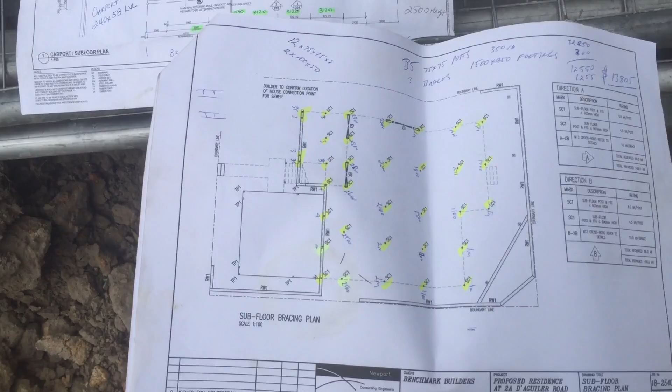They're owner builders, other carpenters, brickies. Okay, to get this sort of experience, it takes a lot of time and effort. If you can get it on video while you're at home at night time, like I do, go chase up how to do things, then it makes things much easier. Okay, it's called research. If you don't know how to do it, find somebody who does.

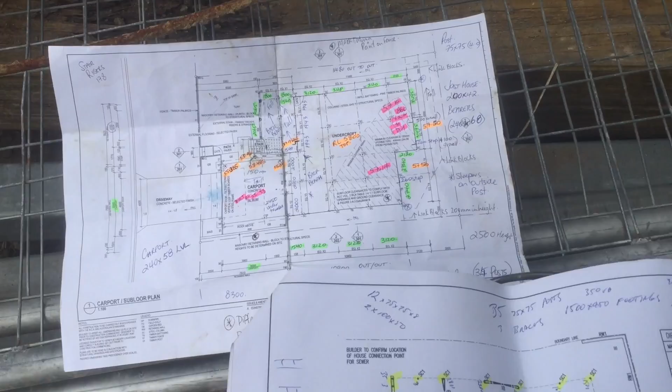Alrighty, what we've got here is a set of engineering plans. Not important who the engineer is. There are many good engineers out there. There are many bad ones. Okay, just like every other contractor, you get good and bad. Varying stages of good. Some fair, some medium, some good, some very good. Alright, I try and stick with the better ones when I can. I do know which is which. I've worked with enough of them. But most of them are okay, as long as you understand who's who and you know what you need to do. I always upgrade on these plans.

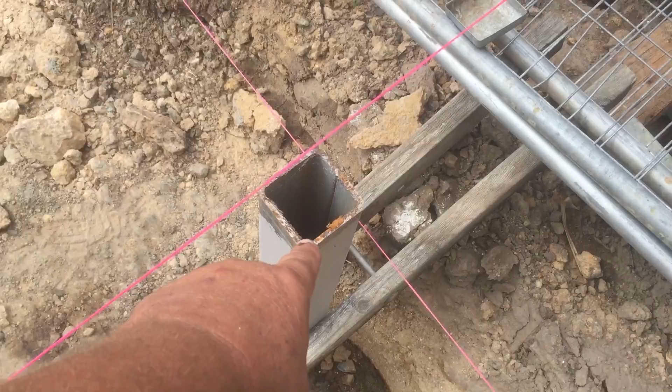For example, the current standard here in Brisbane for 75mm posts is 75 by 75 by 4mm. Okay, 4mm, it's only 4mm thick. This one here is a 5. Alright, she's 5mm thick. This one over here, that one's 6. Okay, that's 6mm. By the time that's chopped down to only 400mm high, you can kick it all you like, you're not going to move the damn thing. Alright, whereas 4mm will still vibrate at 400mm high.

You right, Frank? Yeah, Frank. Try to lift the bag. I'll leave it back there for a minute. Frank trying to hurt himself.

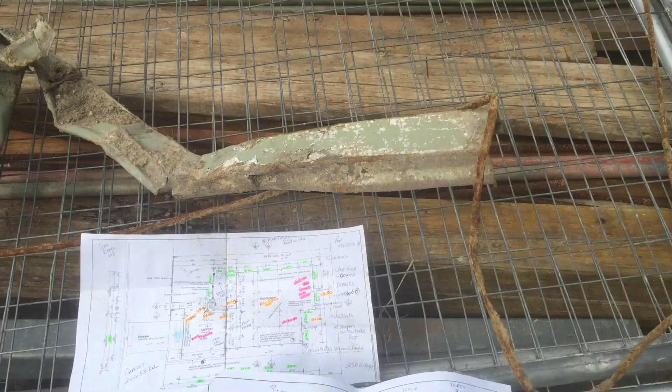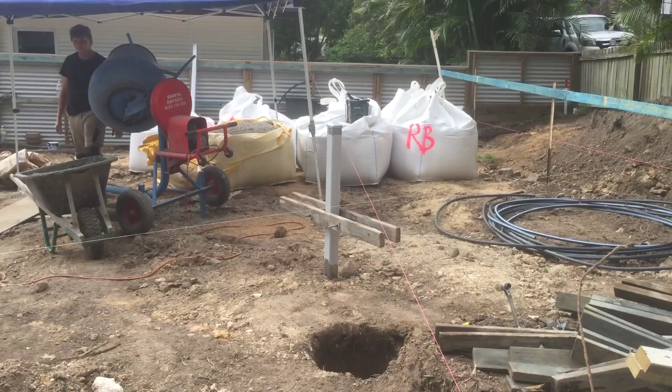Okay. Once again, for those that are doing this sort of work, there's nothing easy about it. This is hard work. If all you can lift is 20 kilo, find somebody else to do the job. Yeah. Frank, my son, I've taught him. He's been working with me the last 4 years. He's able to lift 150 kilo on his shoulders. I do the same. Well, 20 years ago I was lifting 350 kilo on my shoulders. Okay, I could lift 500 with my hips.

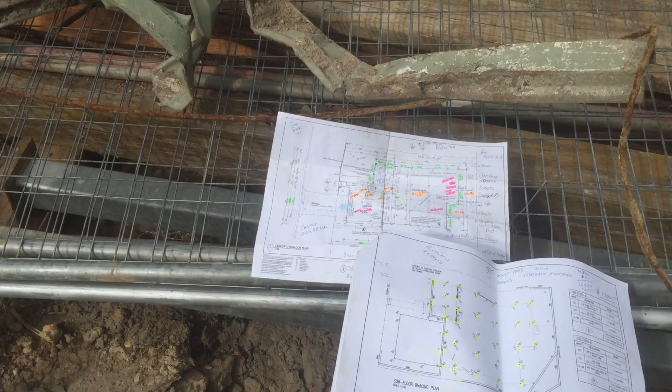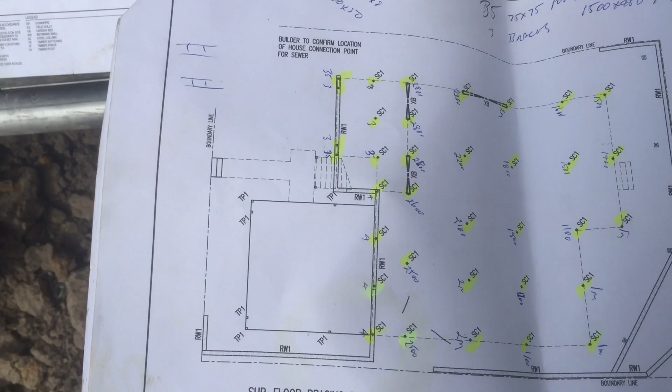For those that are saying, oh, health and safety, well, if you treat yourself correctly and you look after yourself, the strongest man in the world lifts a whole lot more than that, and you can't tell him about health and safety. Alright, there's guys out there lifting 600 kilos with their arms. So I don't know what this 20 kilo rubbish is, but of course if there's people that are that useless on a building site, then they're going to be useless no matter what happens. 20 kilos, geez, 2 shovels cost way more than that.

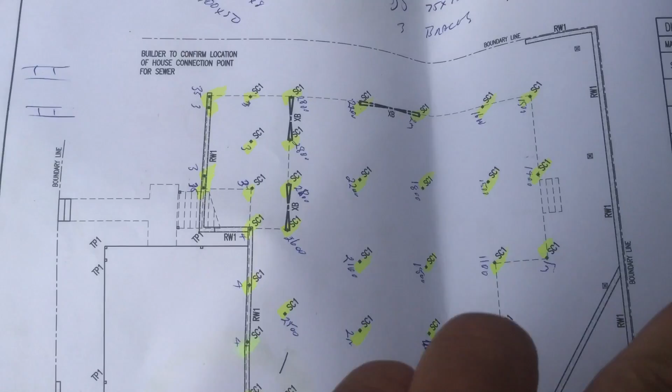Anyway, here we are, there's the engineering. We're working in this section here. Alright, putting these short stumps in, and it gets longer as it goes down there and across the back because it's sloping ground. And then we've got the garage down the bottom here, the carport, which is timber on stirrups. We've got to fit the stirrups. And then we have the architectural, which is all the measurements, which tells us where everything is. Alright, so with all those measurements, to make things work and get everything right, we've had a surveyor in, which is what we need to do by law nowadays to make sure we can get everything passed.

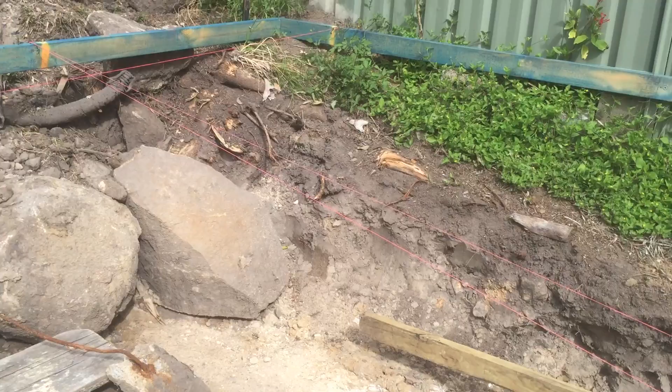Anthony put all the profiles up before the surveyor got here. Okay, and of course the best way to do it, rather than getting a surveyor to put marks in the ground with just one peg, then you have to go and try and bring the marks up, is you have a profile which is offset to the house, so it's out of the way and it can stay up almost the whole build.

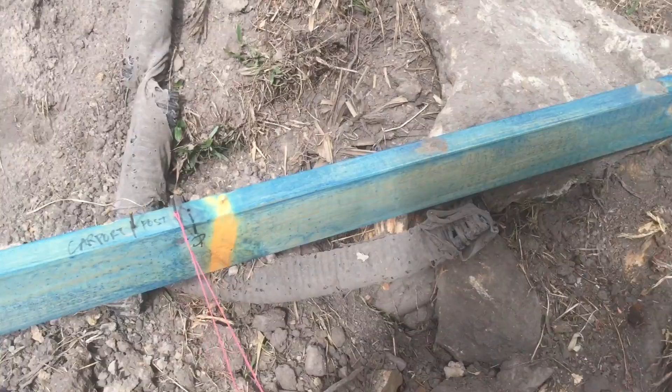And on that profile we then get the surveyor to mark the outside of the house. Surveyor pins, that's the surveyor did that. Okay, same with that one up there. Now that is the outside of the house, outside of the stud wall, outside of floor. Can't go past that. Alright.

Now what we've done is, because Anthony's putting palings around this house, and to make it easier, rather than putting the framework in between each stump, because some of these are only 400 high, of course you want the timber for the palings to go past the posts, so you're nailing it on every second post. It goes on the outside.

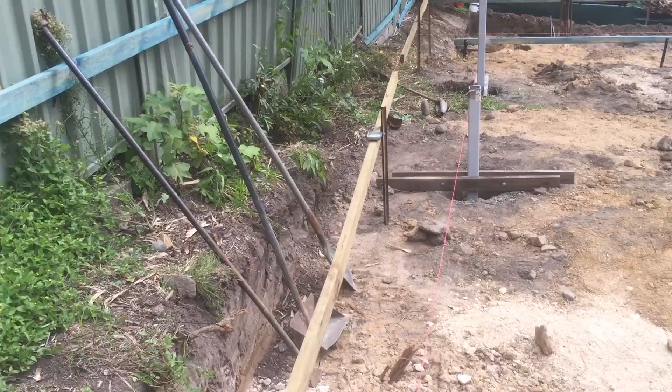So what we've done is we've stepped back 50 mil, so the stump line is 50 mil inside the house, so that way he can put the 35 mil timber down and nail the palings on the side of that. Right, the same on that side, 50 mil in. Now we've done that all the way around the house, except for the carport where it's timber posts, okay, which are exposed.

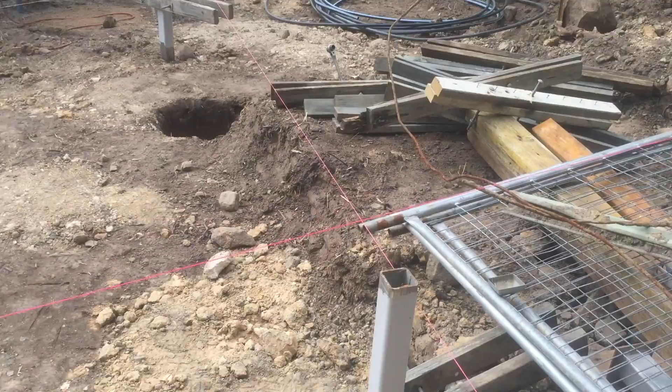All the lines that we have up are all based on 50 mil behind. So this one here, same. Don't know if you can see it, but there's a mark there from the surveyor, which is the outside of this deck here. So it sets these posts here. Okay, so we've stepped back there 50 mil inside, 50 mil under the house.

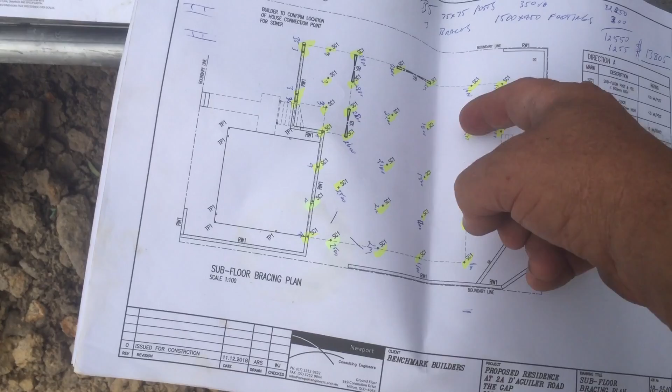Right, this is 50 mil in, that's 50 mil in, that's 50 mil in. So they're all inside the house, okay? And that's what we've done with all these lines. The ones in the middle, of course, are still in. They're measured to fit equally in between those. So they're fine as long as they're inside where we need them.

Because once they're under the house, as long as they're in a straight line so the bearers can go on top of them, that's all that's required. And of course the correct spacings so they don't overdo the engineering. But there are 240 LVLs going on here, 240 by 65s, and they'll span the distances we've got there quite easily with no bounce. Alright, so that's what we did on the profiles.

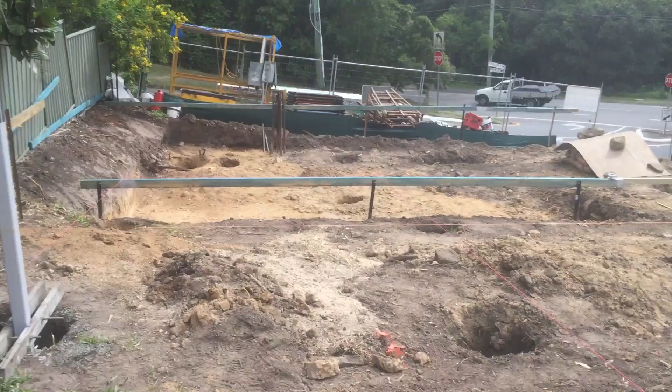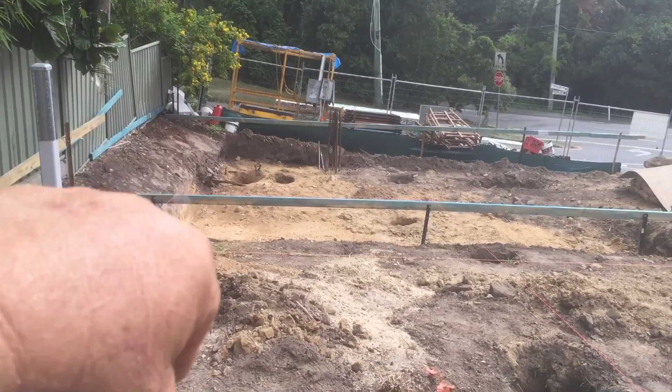So you can see the profile timber all the way around the house. We've stepped it down so we get down to where we can reach it. Some of those posts, those steel posts at the front here, next one down just past that little profile here, they're 8 feet high. Okay, there's no point having a line way up there 3 meters above the ground. So I have to bring the lines down so I can reach the post.

All right, hope you're happy with that. I hope that helps explain a few things for you. And we'll keep moving on.